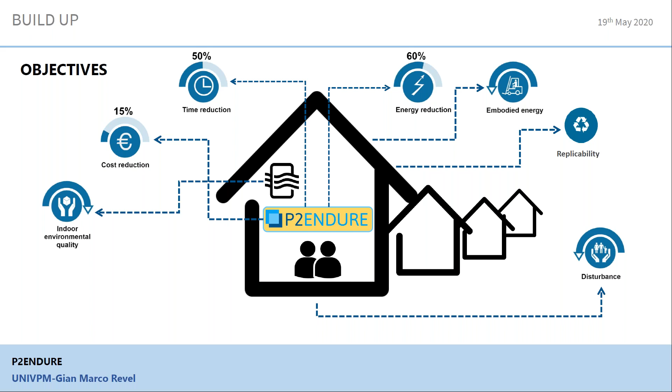Then modeling, and based on the modeling, performing the renovation design. Then off-site manufacturing and on-site assembly of the PnP solutions.

So this is the making. And finally, monitoring the performance and the condition after deep renovation using innovative technologies.

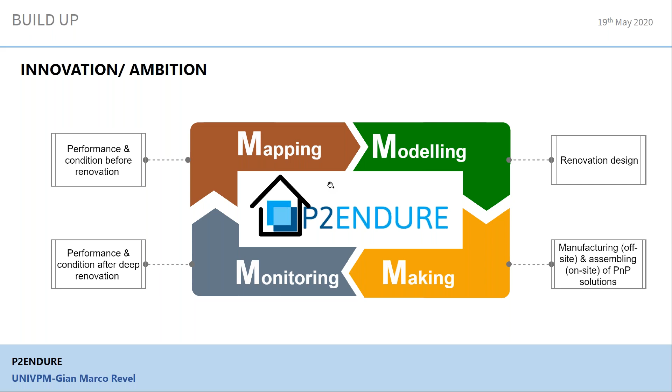This can be, of course, a circular approach where we try to bring some innovation in each of the 4M phases. I'm going to show briefly which are the main innovations that we try to develop and introduce.

Concerning the mapping, basically we try to feed all the information achieved from condition assessment in an as-is-built BIM model, using first of all 3D scan, but also using some innovative technologies like a technology that we developed and patented at Università Politecnica delle Marche, which is the Comfort Eye.

The Comfort Eye is this device that you see here, where I'm clicking with the mouse, which allows very quickly to monitor different comfort quantities and comfort spatial distribution inside environments, allowing identification of main leakages and main problems in a three-dimensional environment.

This, coupled with other technologies like infrared thermography and 3D rendering, is one of the several elements that have been integrated to innovate from the mapping point of view.

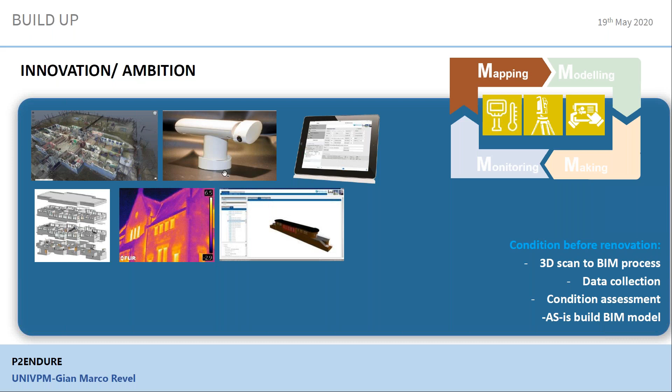Then once the as-is-built BIM model is available, we have been working on the modeling phase, in particular focusing on...

making a kind of smart and automatic BIM-to-BEM process, which is quite a challenging step, not always easily implementable. But we coupled this with a parametric modeler, and this allowed, in particular for some of the demo cases, to speed up the process to make BEM.

When we talk about BEM, of course, we mean building energy model. So passing from the BIM to the energy simulation in a parametric and not too time-consuming way.

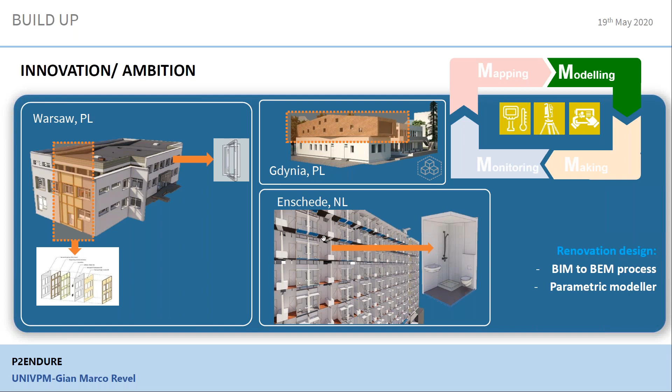So the mapping, of course, and the modeling, of course, are a very important step where we therefore try to also define some key performance indicators and some benchmarks for the baseline.

Here I report some steps that can summarize some of the mapping and modeling processes that have been implemented: creation of the baseline, validation of the baseline with energy bills, creation of the post-renovation model, simulation of the post-renovation model, evaluation of the performance of the renovation.

Basically we try to fine-tune the solution proposed and implemented so as to achieve the target 60% energy saving, which is the target to be achieved.

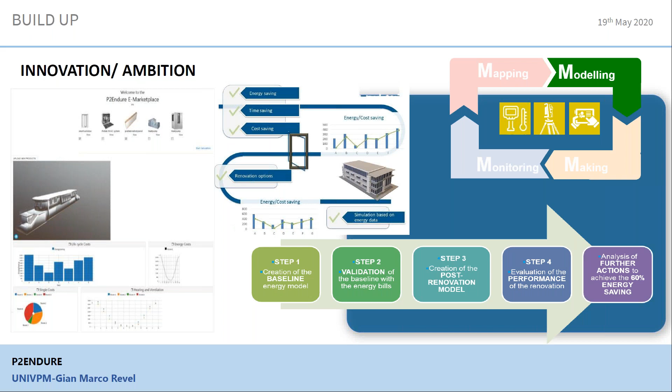The last step, the third step of the process, is the making: manufacturing and assembly of PnP solutions. Here as well, some innovation both on the processes for off-site production and also for robotics, like 3D printing or robotics for installation, have been adopted.

Actually, many of those were already at the prototype level available before the project. So what we really aimed to was integrating all these components into a solid process, which can be referred to as this 4M approach.

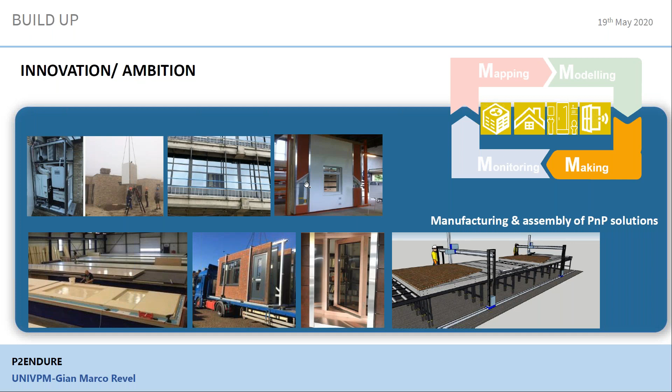And the last step, of course, is to make post-renovation monitoring. This is fundamental, as we know, to make a comparison with the pre-renovation situation, and also to guarantee high quality execution. Particular emphasis has been put on matching the energy targets and cost targets while preserving the indoor environmental quality.

We all know that in recent years a lot of work has been done by really increasing thermal insulation, and now the focus is going more and more in the direction of preserving, in any case, the indoor environmental quality. Here we have some pictures of some of the innovative devices that have been developed and implemented concerning the monitoring, not only of the...

thermal comfort but also of the air quality, and lighting quality, so visual quality as well.

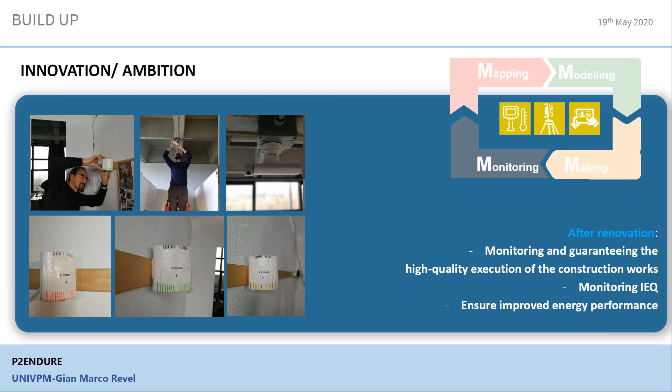So we try to target a multidimensional comfort approach, which has to be validated after the renovation process. This is just an example of some of the raw results.

These are then post-processed from the Comfort Eye, which maps the radiating temperatures in the environment with a resolution that preserves, in any case, the privacy of the user, but is enough to allow understanding of the real comfort distribution inside the environment and eventual fine-tuning of the renovation process that needs to be performed.

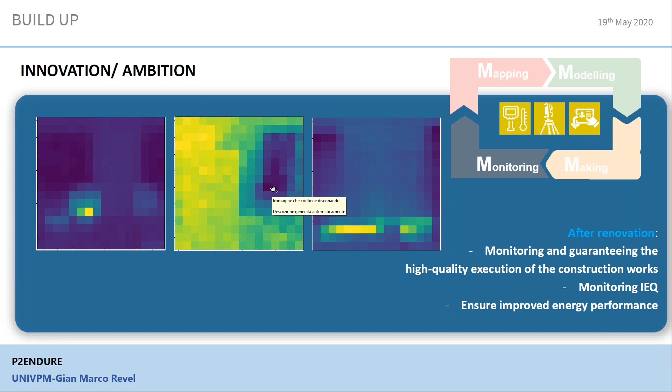Of course, this is, as I said, a circular approach, because then the circularity of the process can restart in such a way as to guarantee reaching the final targets. Several prototypes and innovations, which of course I have no time to go into details right now, have been integrated, ranging from smart windows, smart plug-and-play facade elements, and bath units.

There are several of them that have been integrated, for which you can find information also on the P2Endure website.

One important part of the project, being an innovation action, is of course the demonstration. We tried to make demonstrations, as I said, in different geoclusters and also in different kinds of buildings, both real demonstrators and also, in some cases where it was not possible to perform the desired work before due to local situation.

We implemented contingency plans with virtual demonstrators. So we have several demonstrators around Europe, in the Netherlands, Germany, Denmark, Poland, and Italy. At this time, we have implemented most of the demonstrators, and right now these are some of the results that we already achieved in the different demonstrators for the different objectives.

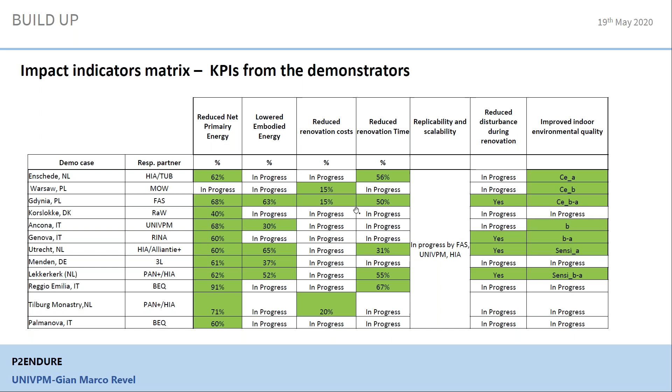A last important part of the project has been to foster also the market implementation of the best available technologies. Basically, P2Endure is making incremental innovation in the single item, but an important part of the innovation is the integration of all of them into a unique approach, and they are the business model that is promoting the approach.

So a new marketplace is at the base of the approach that I just showed from the scientific and technological point of view. I will try very briefly to show, using this diagram, how this can be implemented.

And this, of course, starts from here, from the as-is BIM model. Then from the as-is BIM model, we have the BIM model of the current situation, where from the e-marketplace several solutions that are available on the product on the market, with the product data, can be included. This allows us to have data for energy calculation before and after, using the parametric product data that are available on the e-marketplace.

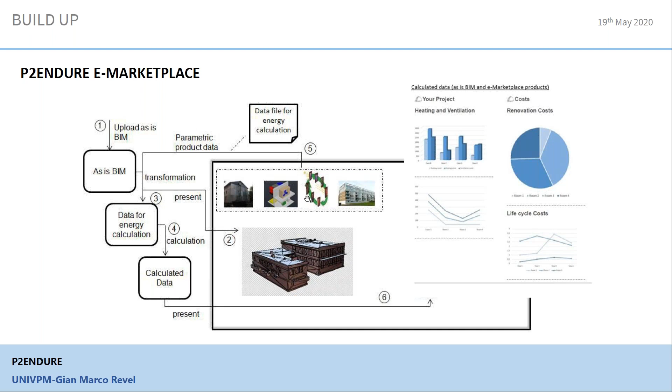And this, of course, requires several steps like the BIM to BEM process, which are not straightforward, that we are trying to integrate into a unique approach, which we believe to be very relevant to increase exploitability and replicability of the solutions, trying to involve all the main actors of the business model.

Which basically are to be involved in a local district renovation platform. So basically, there are different stakeholders that should contribute to this process: the local government, which makes the regulation and can also give some incentives; the owners, the inhabitants, who have to be proactive, also to qualify the demand from the private side.

And finally, of course, the industry and the SMEs of the sector, which should be capable of bringing innovation in the market and giving the answer to the owners according to the local regulations and local available technologies. So the e-marketplace and the business model in the project is meant to satisfy all these items.

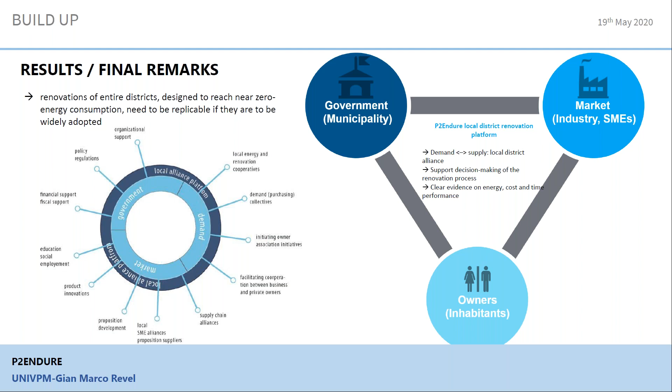Of course, there are lessons learned and future challenges. This is my last slide. So we understood that still, of course, this is a slow process, mostly due to the slow adoption of innovation in the sector, but probably local district alliances may help to overcome the situation.

In many cases there is lack of knowledge, so that's why we believe a knowledge sharing platform can increase the awareness. Low involvement of end users in the retrofit process is another point, which in the future can be helped by the use of gamification techniques. And finally, we really need to move for the deep renovation, where heavy works are required, to mass production.

And so more and more we are trying to push the use of robotization and automatization in prefabrication. So this gives also a final view on future challenges for the application of PnP solutions in the deep renovation process.

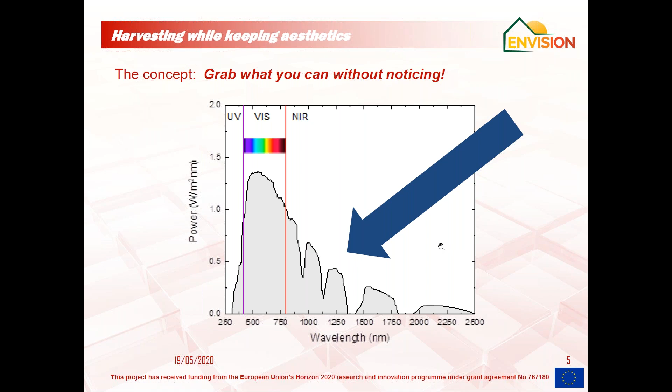If we can use this near infrared, we can make harvesting technologies which are invisible. So the key objectives of the ENVISION project is active harvesting, but our solution should be easily maintained.

And to get maximum efficiency, we would like to link the heat generating facade to a district heating network, so that the energy produced can be fed into this network, so it can be used or even stored in some cases. We want solutions which can be easily installed, have a large scale deployment potential, and should be cost effective with a return of investment of preferably less than 10 years.

There's a short project video available on the website on ENVISION. Unfortunately, today I cannot show it, so I will move to the different technologies we are actually testing.

Here you see two heat harvesting technologies. On the top left are the heat panels, colored: three green panels, a yellow one, and an orange one, in which together with AkzoNobel, the paint company, we developed coatings that harvest near infrared. So we can even make white paints which harvest 40% of the sun, which is very exceptional, because normally 98% of the heat is reflected, so you only have an absorption of about 2%.

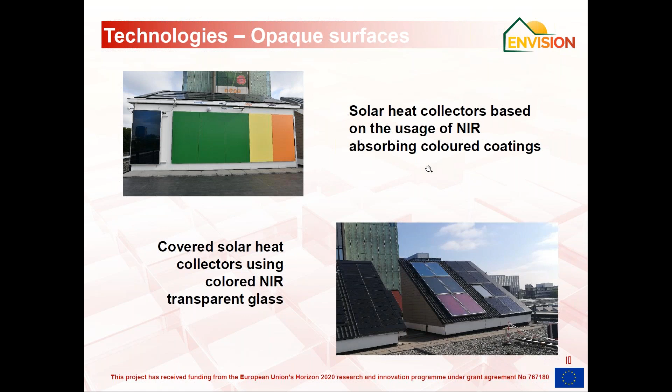These are solutions which can be used on opaque surfaces, but we also said that if we want to use all the building surface, we should also look at transparent parts of the building and see what we can do there. One of the technologies we are investigating is a smart ventilated window, where we have a glass sheet.

This glass sheet harvests near infrared. So the sunlight goes through this glass sheet, and then it heats up one of the inner panes of this glass. The visible light is transmitted inside your building, so you still have light inside. When this inner glass sheet is heating up, this air is fed into the room, or is harvested via a heat exchanger into water, which you can use for heating or creating tap water using a heat pump. This is a completely new concept, allowing a lot of energy to be harvested.

Another, somewhat more conventional technology is photovoltaics. But photovoltaics is normally used on opaque surfaces, such as the roof. In this case, Pilkington has devised PV harvesting glass, which has PV stripes on the glass. Especially this type of glass can be used in stairwells of apartment buildings, where you can view the outside and still have energy harvesting. In this case, the surface area is about 50% covered.

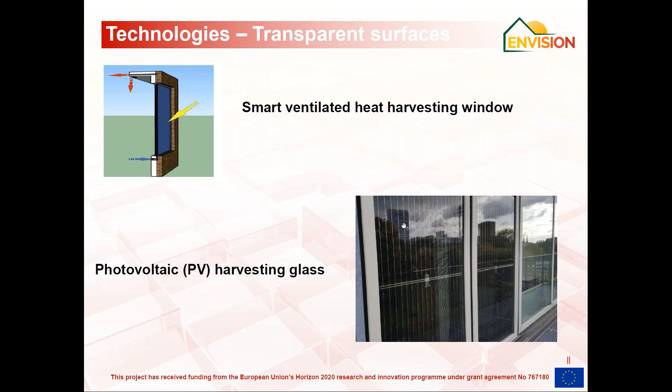Our testing strategy is as follows: all the technologies are first tested in mock-up demo sites, using two main testing facilities. One is the Solar Beat of the Solar Energy Application Center of TNO in the Netherlands, housed at the Eindhoven University of Technology on a roof of the Built Environment faculty. It's a cooperation between TNO and the university, where we test all kinds of PV and thermal solutions. In our case, both the uncovered and covered collectors are tested, as well as the PV glass of Pilkington.

The smart ventilated window is tested at the test lab of EDF in France. All this intermediate testing, before the products are placed in a real demo site, allows the products to be improved in several steps.

In the next step, we move to two demonstration sites. One is located in Italy at the University of Genoa, on the Savona campus, where the technologies of the ventilated window and the solar collectors are coupled to the local smart grid, and the harvested energy is used for heating the buildings on the campus. The University of Genoa is currently investigating how these technologies can be coupled and fed into different generations of heat networks.

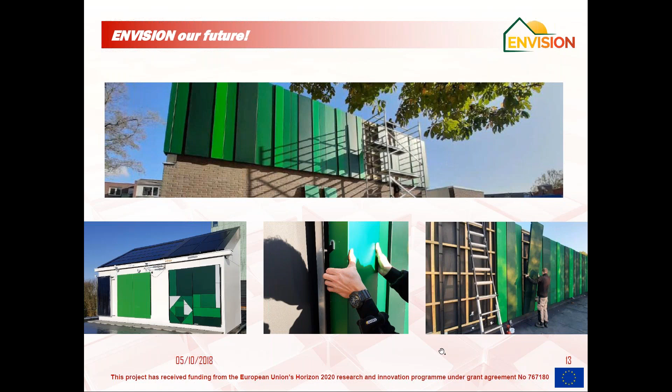Here you see the sports hall in Almere. This is an impression of an apartment building where on the end facades and the front facade, some panels are integrated - the red ones and the gray ones here on the sides - together with the PV on the roof, will ensure a near zero energy building.

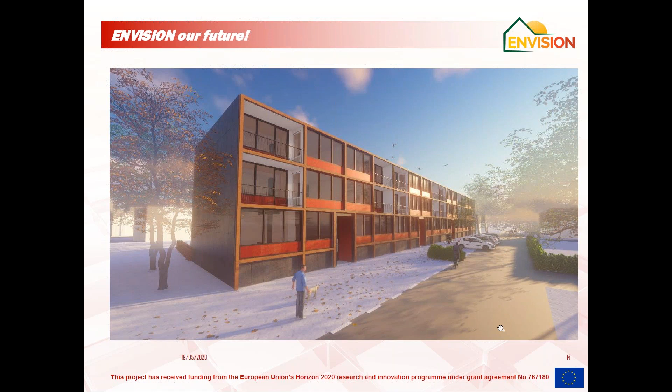And even more impressions. Here is an impression made also for the municipality of Almere, where different panels are integrated in the building with PV solutions on the roof.

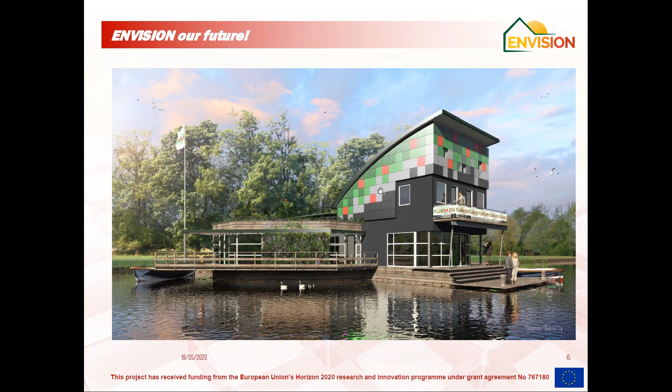I would like to kindly thank all the partners in our ENVISION project, such as BAM, a large building contractor, Energy Pilkington, RINA, Emergo, which is a prefab element producer, EDF, University of Genoa, Vestia Social Housing Corporation, AkzoNobel for developing the panes, and the ventilated windows by BGTEC.

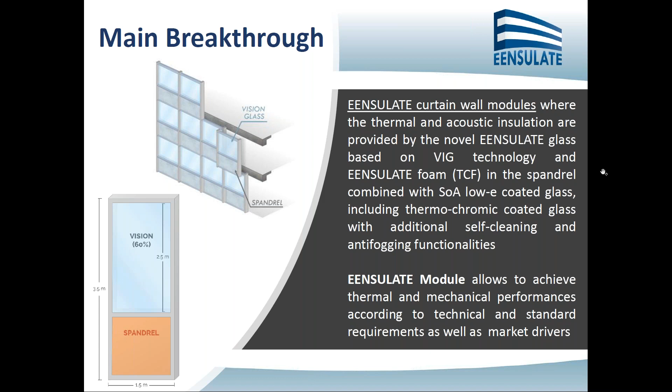The curtain wall modules developed within the EENSULATE project are composed of the novel EENSULATE glass based on VIG technology, and the EENSULATE foam in the spandrel, combined with low-E coated glass, including thermochromic coated glass with additional self-cleaning and anti-fogging functionalities, in order to achieve all the thermal and mechanical performances in agreement with the technical and standard requirements, taking into consideration also the market drivers.

The main technologies at the basis of the products developed within the EENSULATE project are the vacuum insulated glass with innovative sealant and getter technologies, and the highly insulated foams based on monocomponent and bicomponent elements.

The vacuum insulated glass is realized by BGTEC with a tailored and fine-tuned manufacturing process, implementing the innovative sealant and getter strips to ensure the target performances.

Up to now, BGTEC has already realized small-scale VIG prototypes, 500 by 500 millimeters, and these prototypes have been tested, with quite interesting results, achieving a U value in the center of the prototypes of 0.36 watts per square meter Kelvin, and 0.44 watts per square meter Kelvin as an overall U value.

In addition, BGTEC has already realized some large-scale VIG prototypes for additional testing in a real environment, of 1000 by 1000 millimeters. The final scope is to produce real-scale VIG for pilot application with dimensions up to 2060 by 860 millimeters.

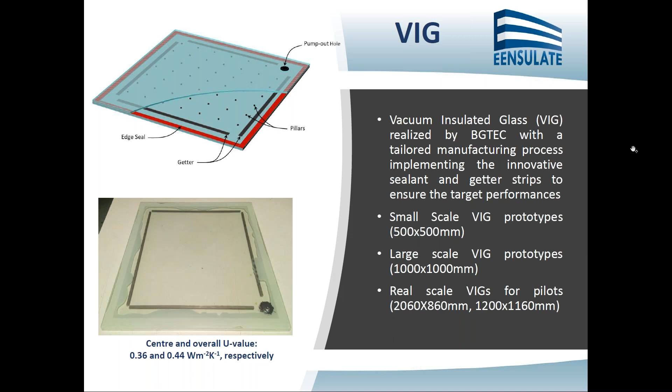Concerning the foam, this particular type of foam is developed by Selena. It is a highly insulating monocomponent foam, or OCF, for windows application, and a two-component foam with high fire class for spandrel application in the EENSULATE module. This innovative foam has a tailored cell morphology, size, and structure in order to enhance thermal performances through precise control of the cell's nucleation events, which generate the foam itself.

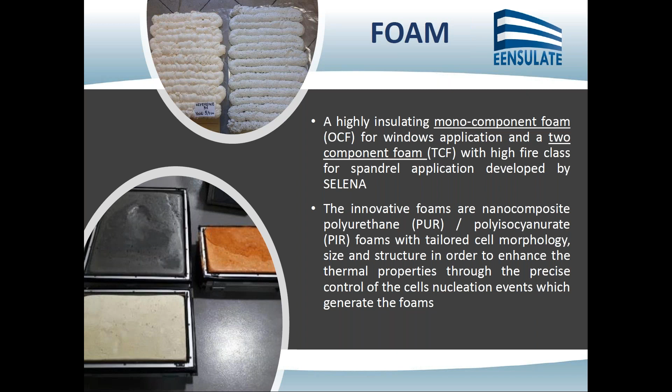Regarding the sealant, it is produced by SAES. The innovative sealant is an epoxy resin-based sealant in strips for application in the vacuum insulated glass. The thermal curing is allowed already at a low temperature, below 200 degrees, and this is a challenging innovation with respect to the sealants already available on the market.

In addition, SAES is working on the possibility of having the monocomponent sealant resin in a syringe dispensable form, so that it can be dispensed directly by whoever will assemble the VIG system, in a range of 60 up to a maximum of 100 degrees.

A key aspect of this sealant is the permeability, because it represents an extremely high barrier for argon, nitrogen, and oxygen. In addition, it is also an active filler for moisture absorption.

Concerning the use of this sealant, regarding the process, it is mainly done in air with easy handling. But concerning the storing, it is necessary to stock it in a freezer at a temperature below minus 20 degrees in order to preserve its properties.

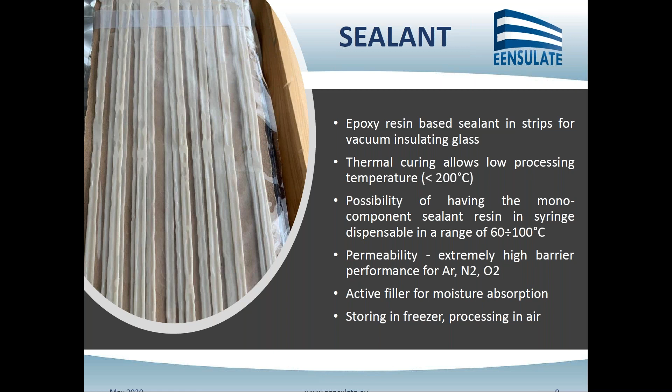The getter is again developed by SAES. It is a distributed getter realized with an innovative zirconium-based alloy with extremely high nitrogen capacity. The getter is composed of laminated double-side getter strips with a size of 200 micrometers thick and 8 millimeters wide. This particular size of the getter enables its utilization in the VIG technology because of the limited thickness.

It is again easy handling and it is positioned in air during the production process of the VIG. The getter activation process is performed by radio frequency heating under vacuum pumping.

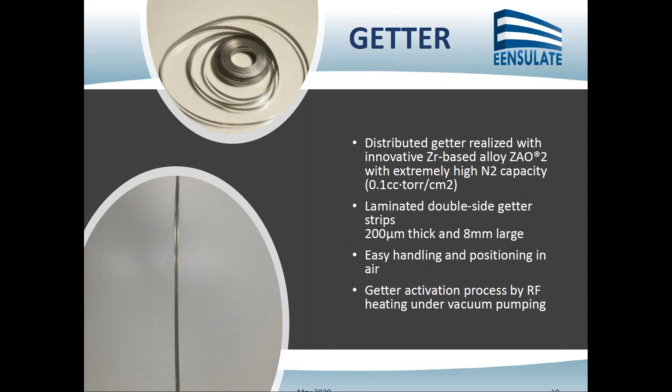In EENSULATE, we have 3 different demonstration buildings located in different climatic areas of Europe. 2 of them are placed in Poland and 1 in the south of Italy.

The first demo building is a Polish school located in Dzierżoniów, and the intervention consists of renovating the facade system by installing the EENSULATE module. In this case, we will install both the VIG developed within the EENSULATE project, which is the innovative solution, and some modules with triple glaze units already available on the market. This approach will ensure the possibility of comparing the measurements performed during the monitoring phase in order to assess the actual performance of our system with respect to systems already available on the market.

The second demo building is the museum, located again in Dzierżoniów in Poland. This is a very particular application because it is an old building, representing a historic and artistic heritage. Due to this, the fact that it is a valuable building with restrictions on the type of intervention that can be performed, the intervention foreseen in this building is the renovation of some windows. In particular, the intervention consists in simply renovating the original sash and installing in the original sash the VIG developed by the EENSULATE project.